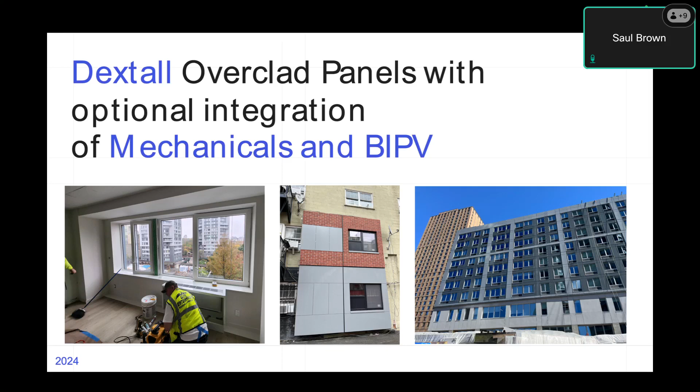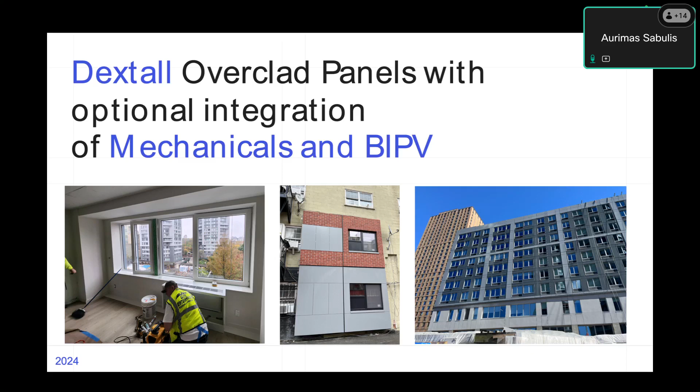I'm happy to be here and happy to talk about overcladding the existing building structures and really provide some of the examples that we were a part of in terms of the projects, and also some of the developments that we're currently working on. So I'm the CEO and a founder of Dextall, and today I want to spend time talking a little bit about the product itself, like what sort of options we have for overclads for existing building structures. I'm going to dive into a couple of the projects, and I will show you what exactly we've done with them and what was the approach towards those projects.

Before I go into explaining projects, I want to talk a little bit about Dextall's offered solutions for overcladding the existing building structure. So some of you know Dextall, some of you don't, but Dextall predominantly was founded to provide unitized prefabricated solutions for new construction buildings, and so we've adapted to some degree a new construction panel for the retrofit application. So our panels are non-combustible. They're built from a light gauge steel stud system, and we have a variety of cladding material that we can use on them. That includes aluminum, ACM, which is not really allowed anymore in New York City, fiber cement, and then last one, we'll show you that we can also do some of the photovoltaic stuff as well.

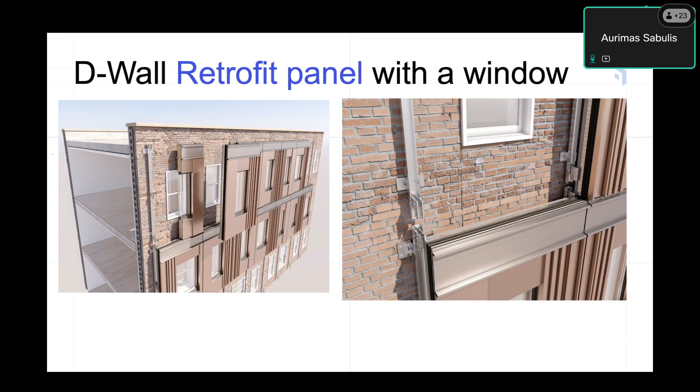So this is one of the examples how the panels are being attached to existing building structure. But I also wanted to show you a quick video that I think illustrates a little bit better what that panel installation really looks like. So you see more of a conventional brick facade that you'll see in most of the boroughs in New York City. It looks very simple, but we essentially install brackets and the rails on the existing building structure. Those brackets obviously cannot be just attached to the brick. They are attached to more of a structure behind the brick. So whether it would be a slab condition or a block, we do pull tests, and then we attach the rail system. The panels come fully pre-assembled, and they are palletized.

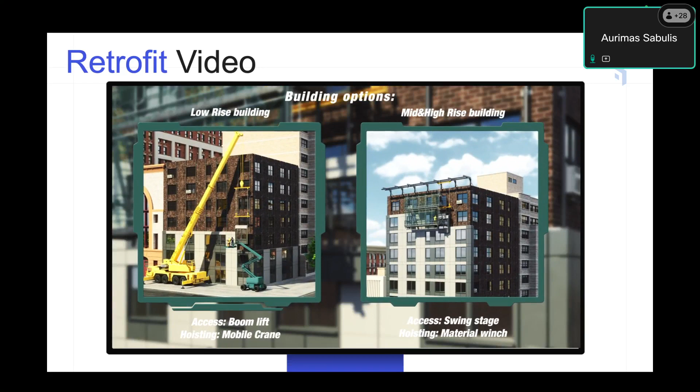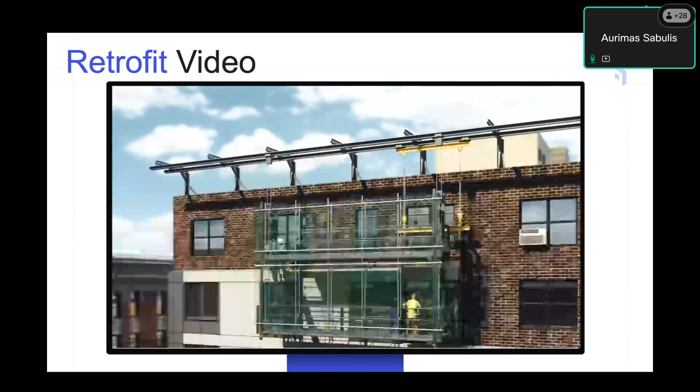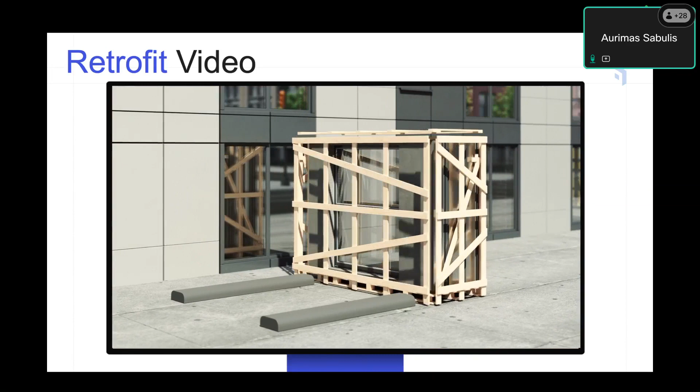There's various types of how you can install the panels. You can do it with the mobile crane, or you can do it with the suspended platform like we're showing here. So the panels start being installed on a starter sill, like you can see here. The starter sill is being added at the ground floor. Panels being disassembled from the pallets. And as you can see, the panels already include cladding material. It has a window already installed inside it, and it also has a gasketing system around. So there's no caulking that is necessary when installing Dextall panels. And you can see here how the panel is being hung on the brackets that were pre-installed on the building. And then basically you go in a corkscrew principle around the building.

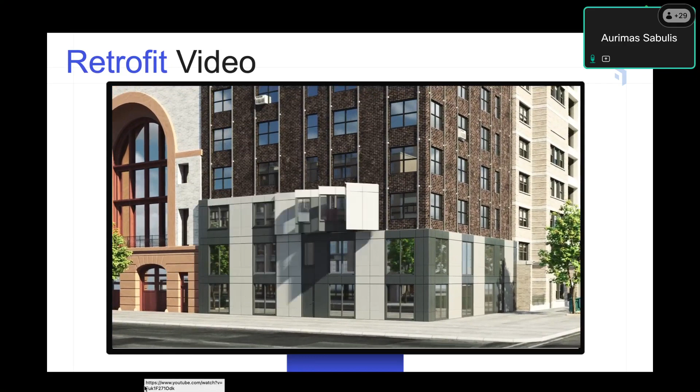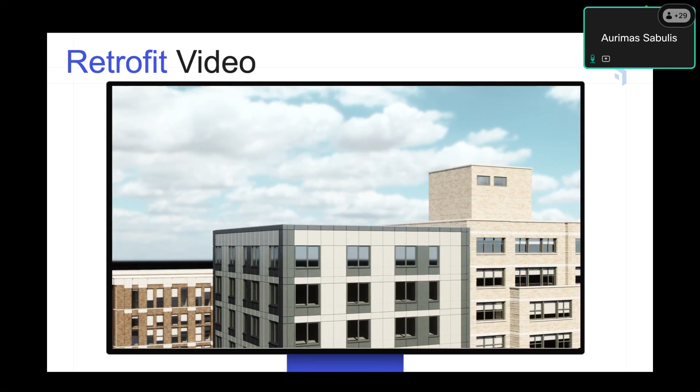We do fire stopping at every level. And so the window opening matches the existing window opening. Once the panel is installed, the old window goes out. We do the fire stopping around that window, and then you basically install the return for the drywall. So this is how traditionally we expect the panels to go on. This particular panel starts at 6 inches, and you need like a 4 to 4.5 inch installation gap. So it extends out about 10 inches or so from the existing building facade. So there might be some encroachment considerations when dealing with buildings that are facing the existing sidewalks or public walkways.

We also have introduced a new panel system. This is a brand new development called the S-Wall, which stands for slim wall. Essentially it's a mineral wool based panel that is compressed, and then it has an aluminum cassette over it. So it doesn't really look like your warehouse panel. It really has the texture to it, and it's actually slimmer.

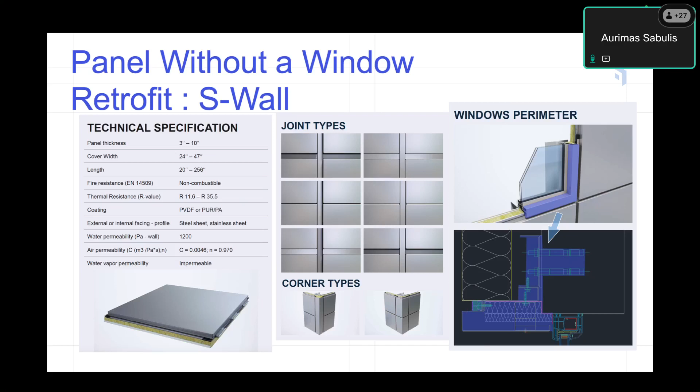This panel is actually also less expensive, and we're seeing quite a big surge of interest related to this particular product. These are a couple of buildings we're doing in the Bronx starting September, October, and they will utilize this S-Wall panel with existing windows already being part of the structure. So we're not bringing our D-Wall retrofit panel. In this particular case, we're just overcladding the opaque part of the structure.

So now we have two panel systems that essentially can service slightly different requirements for the project. D-Wall, as I've shown you, has a pre-installed window. It comes as a full package deal. This just comes as a panel, but it also connects with a gasketed perimeter system. Both panels have mineral wool insulation, and especially in New York City, most of the time we utilize aluminum as a cladding material, but for the D-Wall system we have other options as well. So again, two options here.

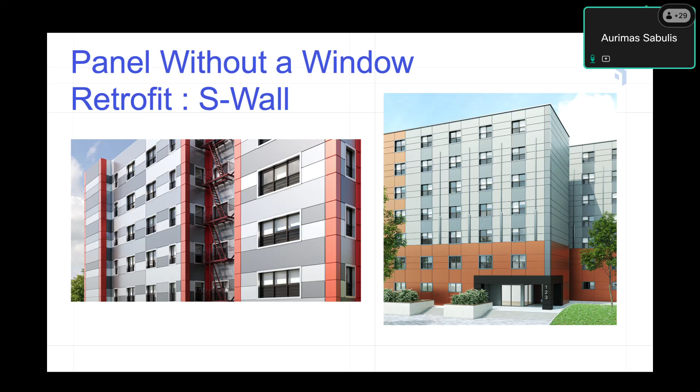We're almost done with this building, but the process was a little bit different than what I showed you in the first two slides, how the panels are attached. In this particular case, this project belongs to L&M. They were looking to open up the window openings, and once they looked into that, they realized there's just a lot of work that has to be done around the window openings, then potentially overcladding or over-insulating the building. It would have required so much effort and so much coordination, and it probably would have cost a significant amount of dollars.

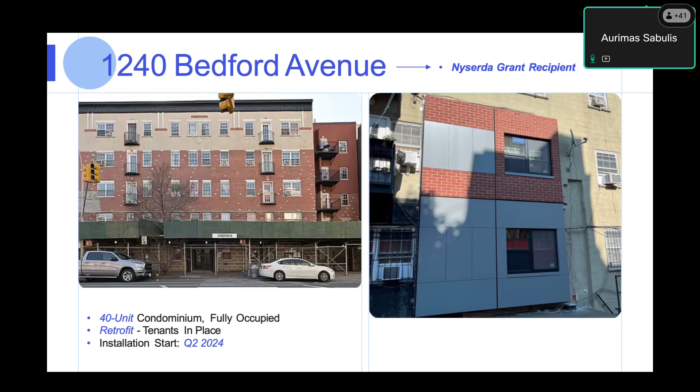And again, this is significantly less tenant disturbance because tenants stay in place. Once the panels are installed, you can quickly go in and remove the existing window, and then just wrap the window perimeter with drywall returns. So you can see here, this is that same installation.

It's a little bit tricky to do water tests. You can't really perform the traditional on-site water tests in these particular conditions, because these panels are gasketed. We ran a bunch of water hose tests just to prove that the panels don't leak, because there's a gap between the existing building structure and our panels. It's about 4 inches, and so we want to make sure that there's no excessive penetration of moisture

going into that cavity. So those are the methods that we believe will be more commonly used than the previous one, which is essentially overcladding over the existing building structure. But just to point out, there's quite a bit of work that's required prior to hanging the panels. Hanging the panels is honestly probably the easiest part of the job.

The most nuanced part of the job is really measuring the building. So we do 3D scans, we collect all the point clouds, and then transfer that to Revit, where we understand the building structure and all the deviations that this building has. Existing buildings sometimes have bows on the facade that you really can't tell just from looking with the naked eye. The windows can be crooked to one side or the other, so there's quite a bit of deviation from the original as-built drawings.

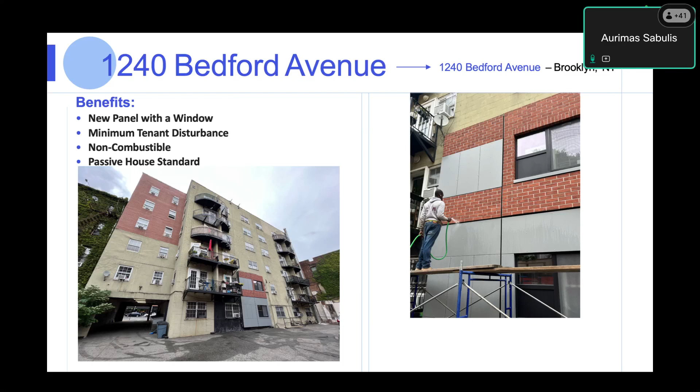So we design the anchors, then the third-party engineers approve those anchors, and that's the process that every building has to undergo, because we really don't know. Once we open the wall, sometimes it's hard to know what's behind it, right? And that's a crucial part. But again, once you figure that part out, the rest is pretty straightforward. Hanging anchors, putting the tracks to hang the panels, and then hanging the panels.

We are also working with NYSERDA. NYSERDA provided us additional grants to create an integration, almost like a one-stop solution with mechanical systems, so heat pumps. We are probably 6 months away from launching our new product that will feature a heat pump integration within our system. So we will deliver the panel that already has all the ducts, it has all the perforations or

louvers. So really, we don't even need the louvers. The metal cladding can just get perforated. And then once the panel gets to the site, all you need to do is essentially hang the box from the inside to sort of finish off this mechanical integration. So you don't need to tinker with louvers, with installation of the ducts, with installation of additional returns. Everything is being done in factory-controlled conditions, and then all that's required is just hanging the box.

We've looked at this system as a more practical system to integrate mechanical systems within the prefab panels, essentially unitizing it per panel rather than centralizing it and running some sort of ductwork or piping between our panels and the existing building structure. That just requires significantly more work, and the maintenance aspect of it in this particular case could be significantly more streamlined.

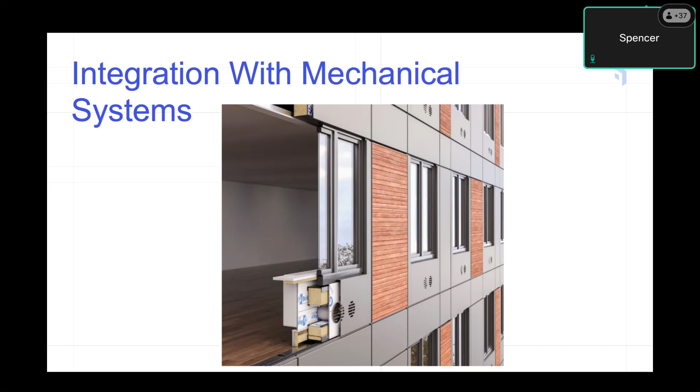Okay, so the box is inside, and it's just how you penetrate to the outside for your pressure. Correct. Okay, that makes sense. Thank you. Yeah, and in terms of maintenance, you can always access the box, and if something goes wrong with the box, instead of looking into a centralized system and trying to figure out where the fix is necessary, all you need to do is replace the box. So in terms of dealing with access to units with tenants, this is probably the easiest and most straightforward solution there is.

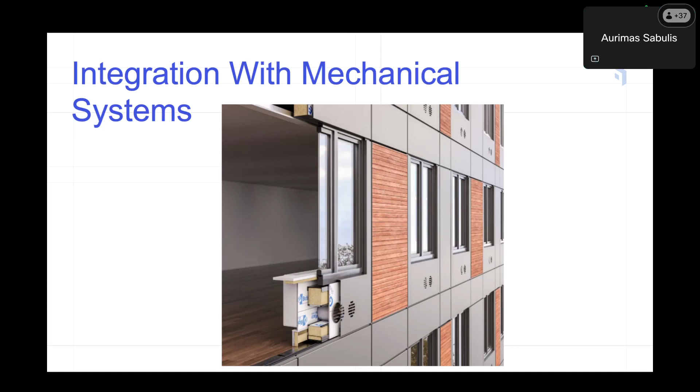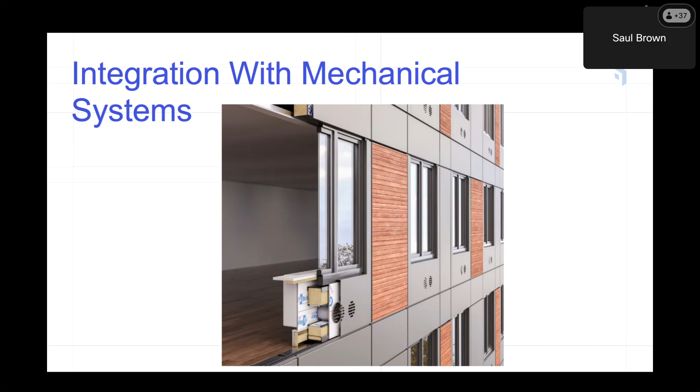I guess, Aurimas, one last question since we have a few minutes. Can you speak a bit to the insulative values and air tightness values that you're targeting? I realize it probably differs for the different thicknesses of panels, but in terms of creating high performance conditions and reaching Passive House standards, what are your targets for your system? Yeah, that's a great question. So actually, Dextall is the only prefabricated solution provider for exterior walls for mid and high-rise applications that already has Passive House certification. We went through the entire process with PHIUS, and PHIUS certified our panels to be used in Passive House applications.

Our R-value ranges from R16.9 to about R30, depending on the thickness of the panel that you're attaching to the building. So again, R16 to R30, and the air tightness is Passive House level air tightness that ensures a superb envelope enclosure. It heavily relies on a gasketed perimeter with multiple gaskets, and it also has vapor tapes on the inside of the panels.